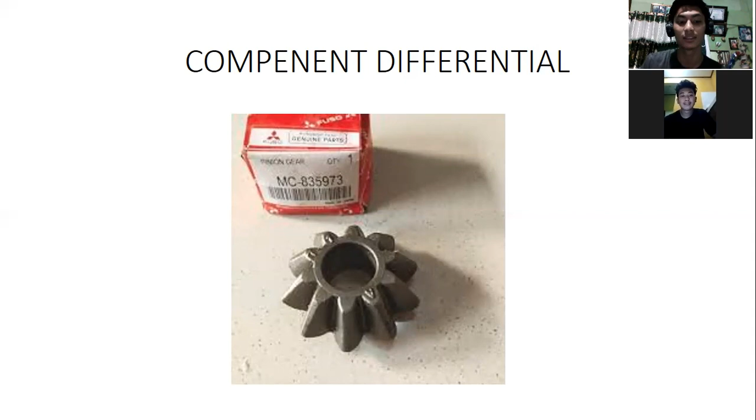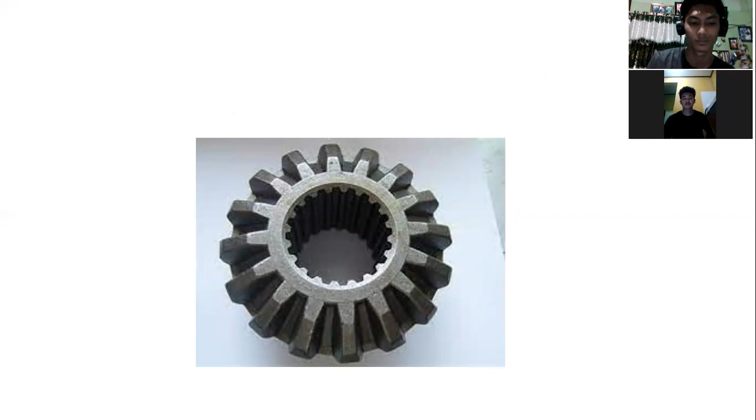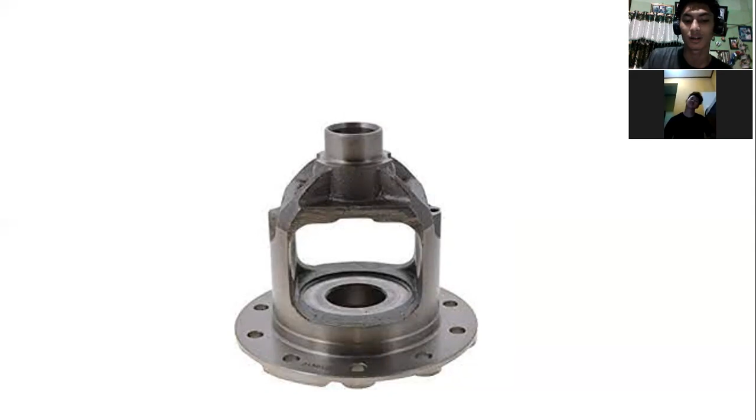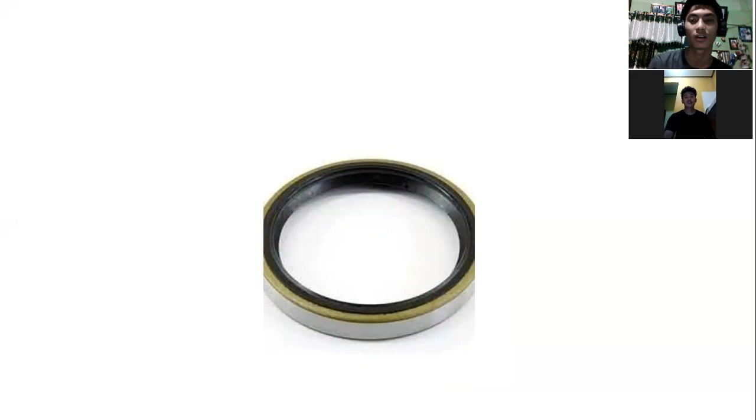The component differential: number one, pinion gear serves to continue the rotation to the side gear when turning. Number two, side gear serves to continue the rotation to the pinion gear. Differential case, a function as a side gear holder and a pinion gear. Oil seal serves to prevent oil leakage. Cap seal serves as an oil seal holder.

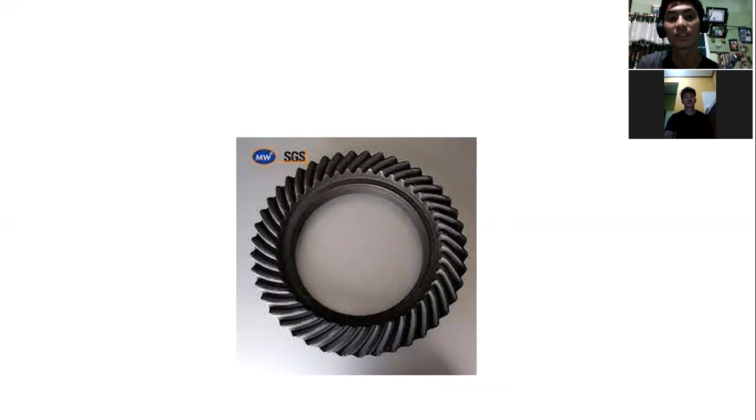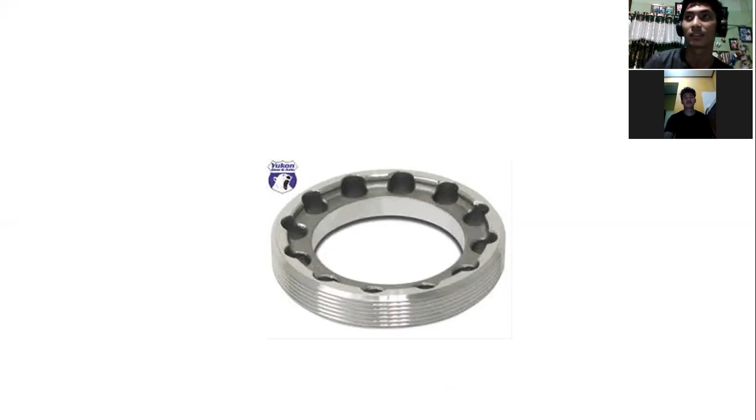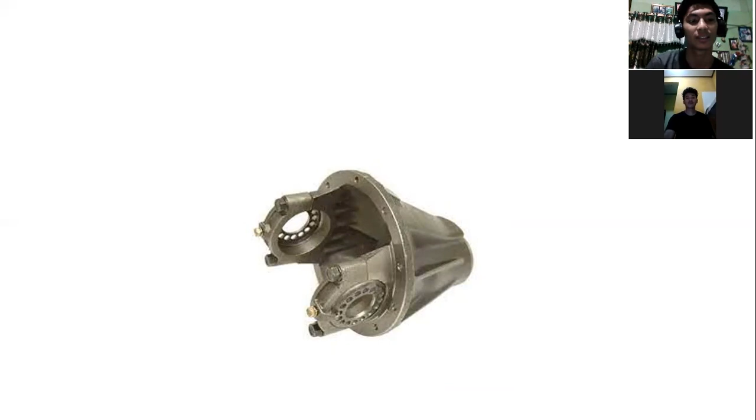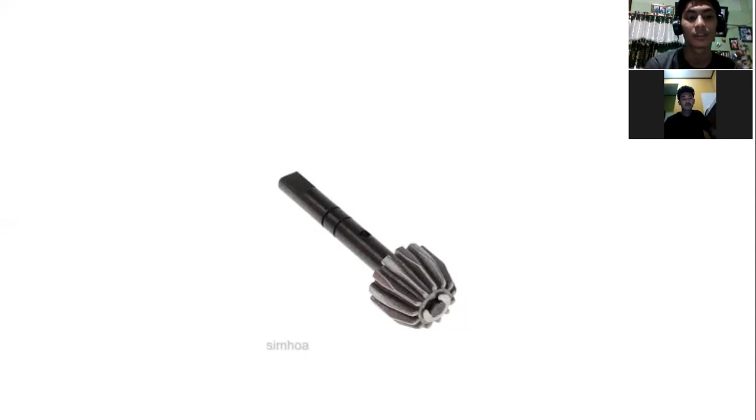Cup bearing serves as a bearing cover. Shim serves as a seal. Lock adjusting serves as locking the adjusting gear. Outer race bearing serves as an inner bearing holder. Shaft pinion gear serves as a stand for the pinion gear. Locking shaft pinion gear bearing serves to reduce friction between two moving components, support the rotation position of components and facilitate rotation on a rotating shaft against a fixed component. Spacer serves to give distance between front bearing and rear bearing. Nut locking drive shaft.

How does the differential work? Differential work: the drive shaft will receive rotation from the transmission, which will be forwarded to the drive pinion. The drive pinion will rotate the ring gear, and the ring gear together with the differential case will rotate. The pinion gear will rotate with the differential case because the differential case and pinion gear are connected to the pinion shaft. Then the pinion gear will continue rotation to the side gear. This side gear rotation will then be forwarded to the final drive through the axle shaft.

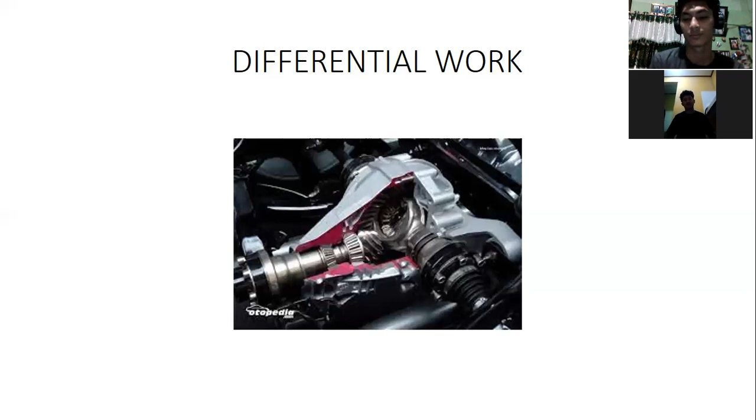And number 4, gloves, hand gloves. Gloves are one of the personal protective equipment to protect all parts of our hand down to the fingers while doing a job. The safety glove serves to protect our hand from various kinds of hazards, for example fire, hot and cold temperature, radiation, electric current, impacts and blows, scratches by sharp objects. Okay.